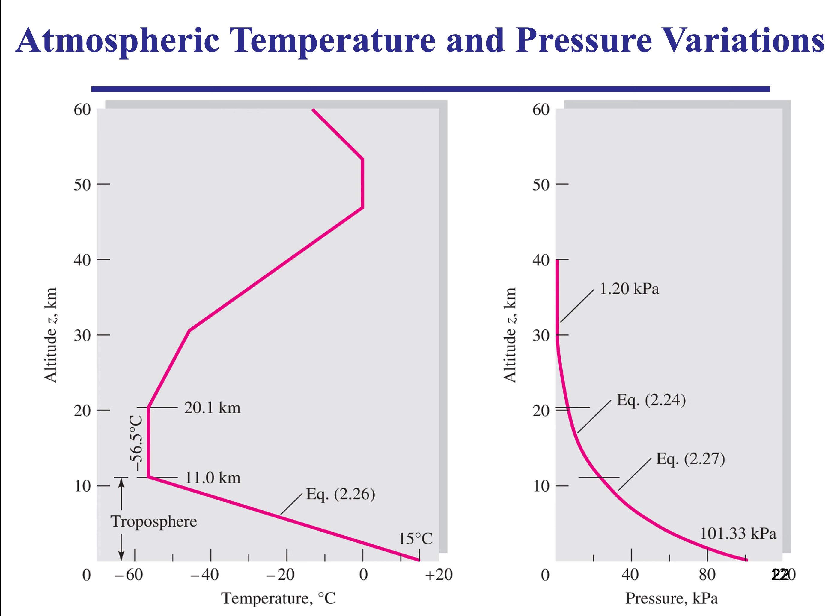So as we said, let's take Z to be the altitude from the surface of the Earth, pointing away from the center of the Earth towards outer space. Let's take the surface temperature, for instance, 15 degrees C, that's the air temperature, and around minus 50 at, let's say, 10 kilometers. That's where airplanes fly normally when they cruise, so around 35,000 feet.

So we want to show that this linear profile in temperature actually leads to an exponential or a power law relationship in the pressure. And we want, as a homework, to plot it. So let's do that.

So we'll start with a linear temperature profile. We can write the temperature in the form of AZ plus B, as you can see here. So T as a function of Z has a slope of A and B. And if you want to have the A and B, you need 2 points at 2 different altitudes where the temperature is known. For instance, here are 2 points that you can use, and this is basic linear algebra. You can easily get the A and B.

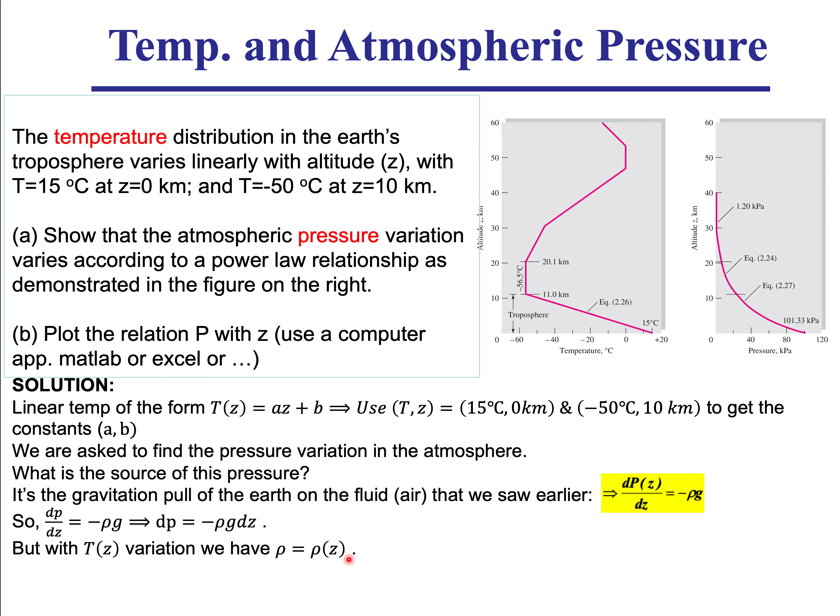Now, is it going to be linear like the temperature? We'll see based on the ideal gas law. So if we use the ideal gas relationship, you remember it as Pv = RT, where v is the specific volume. Specific volume is just 1 over density. So we can rearrange the density on one side. The density depends on the pressure. The higher the pressure, the higher the density. And the lower the temperature, the higher the density. So density depends on both pressure and temperature.

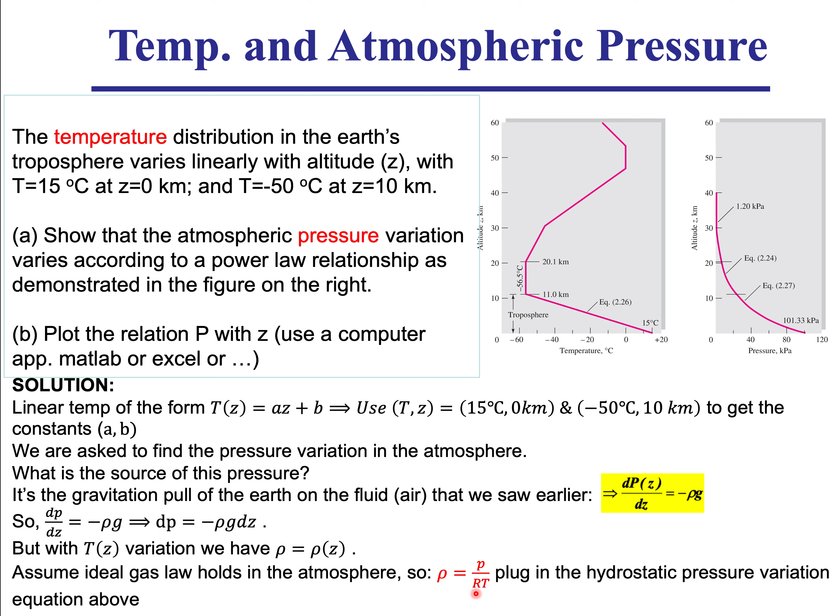So let's take this rho, plug it in here. So dP will be minus P over RT g dz. R is the gas constant for air, and T is the temperature. So we've replaced them, dP, and then we still have the minus sign. It's associated with us choosing the coordinate system z to be pointing away from the center of the Earth. And then we have a relationship between this temperature T and z that's given to us in the plot to be linear. And depending on the temperatures themselves, we can get the A and B.

So let's take this T, plug it back here, and we will get dP is minus P over R(Az + B) times g dz. Let's see. R is a constant, A is a constant, z varies, B is a constant, g is a constant, and then we can separate variables, so we can take the P to the other side. So dP over P is equal to minus this term times dz, and then we can easily integrate.

So we've taken the pressure to the left-hand side, and what do you get? Let's integrate from the surface of the Earth, z equals 0, to any altitude z. At the surface of the Earth, the pressure is atmospheric, and we want to know what the pressure at any altitude is going to be. So the integration of 1 over P, or 1 over x, would be the natural logarithm of x, and this thing will be done in a similar way.

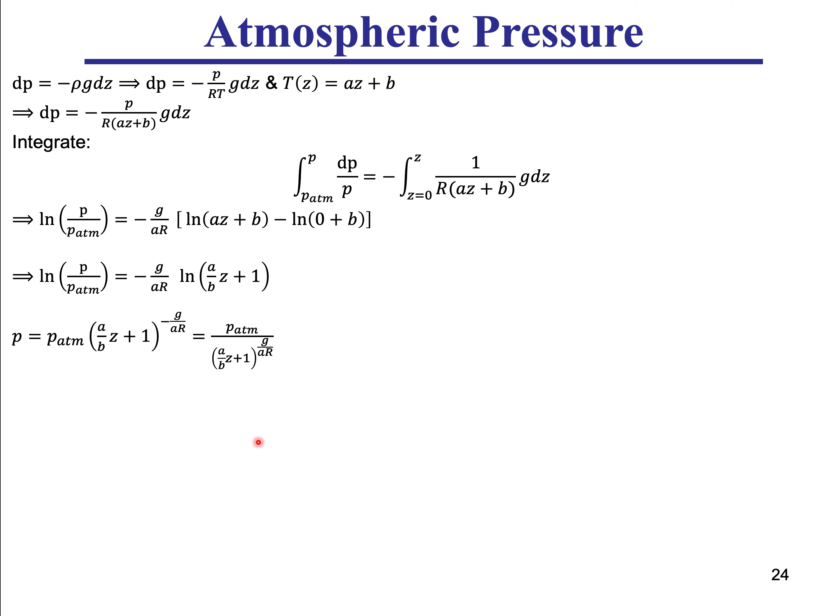So now that we have learned about the atmosphere, there are other implications about its content and how the atmospheric pressure comes about.

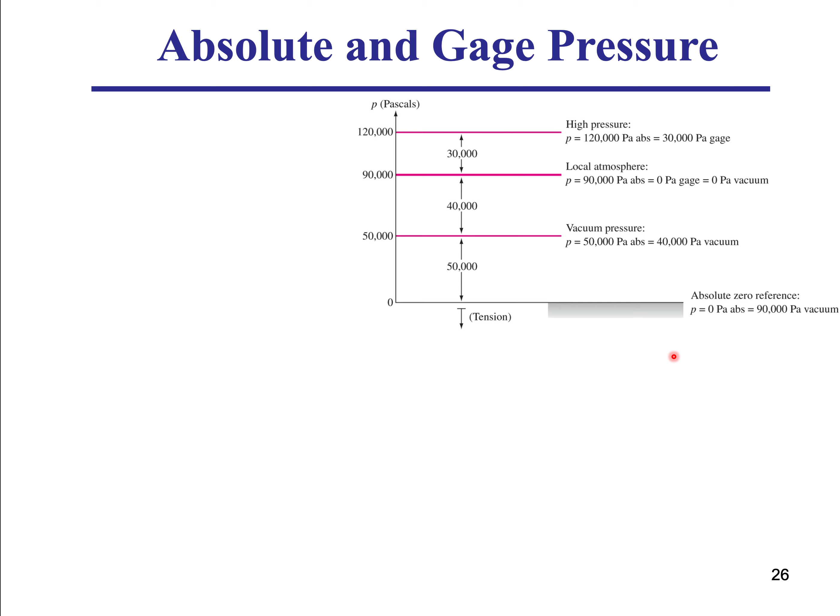There is one last thing we want to talk about, because this is also important from an industrial point of view, which is the convention that people use to report pressure. And that's all relative to the atmospheric pressure. So we know that the atmospheric pressure at the surface of the Earth is about 100 kilopascal.

And this is really pretty much, as we have seen in the thermodynamic tables of water, that water boils at sea level at around 100 degrees C, and when you go much higher in altitude, it can boil at a much lower temperature. So this pressure is the thermodynamic pressure, and this is really the absolute pressure. We refer to it as the absolute pressure. So there is an S missing here, or the absolute pressure scale.

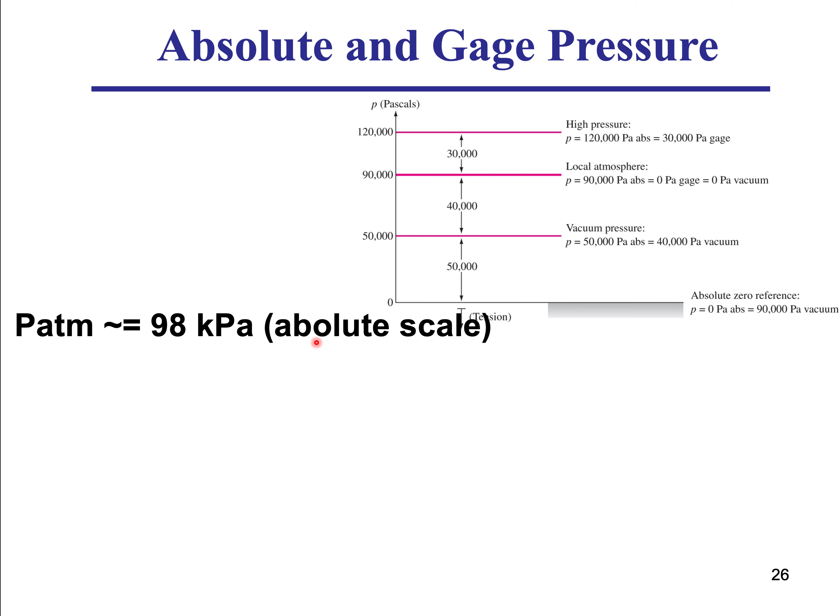But now you go to the gas station and you want to fill your car tire with compressed air, and then you look at the gauge, and you'll notice that when your gauge is open to the atmosphere, it's going to give you zero pressure, and this is the convention that we want to emphasize in this slide. That is, there are industrial conventions. Different industries report pressure in a different way.

So as thermodynamic engineers, there's no way about dealing with absolute pressure. What you see is what you get. It's the absolute pressure. But as practical engineers, people who work with pressure vessels, with tires, with pumps and so on, they deal with what we call gauge pressure. So when they report the pressure, they already subtract the atmospheric pressure from it. So that's a zero gauge pressure, and it already has the atmospheric pressure subtracted from the reading.

So when you're 10 psi, what is the atmospheric pressure? It's 100 kilopascal. That's about 15 psi. So when you fill your tire with 10 psi, you're filling it with 10 psi above the atmospheric pressure, which means you're really filling it with 25 psi in terms of absolute pressure scale.

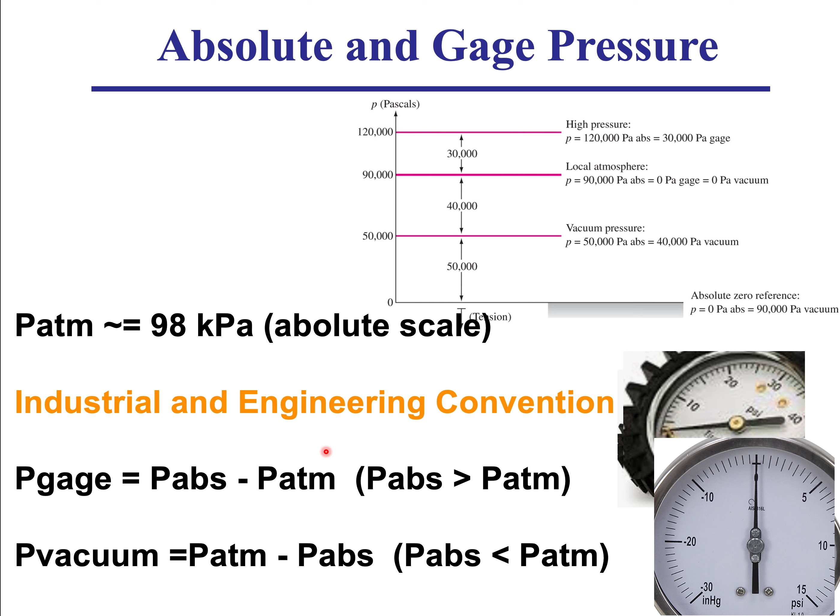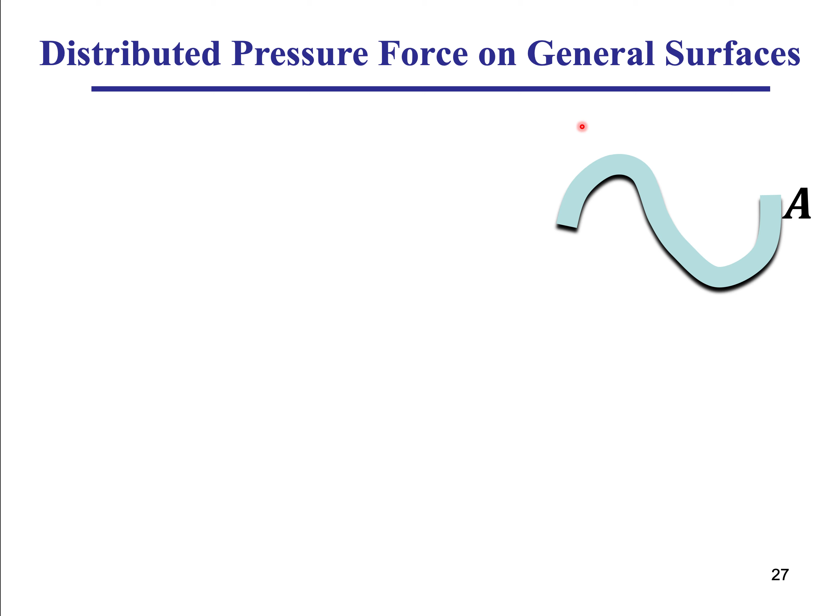So the next thing that we want to cover in this chapter 2 is when we have a surface of an area A, and we have a pressure distribution around that particular surface. So this pressure distribution could be the atmospheric pressure, uniform around it, or this could be a surface that's submerged under the surface of the water, so it has different pressures at different depths. Whichever it is, this top surface that we're talking about has a total area A, and has a pressure distribution on top of that surface.

And we are interested in knowing what is the net force that this pressure is going to produce on this surface, and what is the direction of that force, in other words, what are its three orthogonal components in the I, J, and K vector space, or in the X, Y, Z components. What are they for this force?

So this brings us back to our previous lecture that you really need now to remember and grasp very well, that pressure acts on a surface in a compressive fashion, so towards the surface, and it's also perpendicular. It's a force per unit area, so it's a force perpendicular to that area, pointing to that area. But now you see our surface here is not flat, so when the pressure is perpendicular on this piece of the area, it points where I'm pointing with the arrow. But if this is the area I'm considering, and I'm interested in the pressure force on this little area here, it will be pointing perpendicular in this direction that I have just prescribed with the mouse.

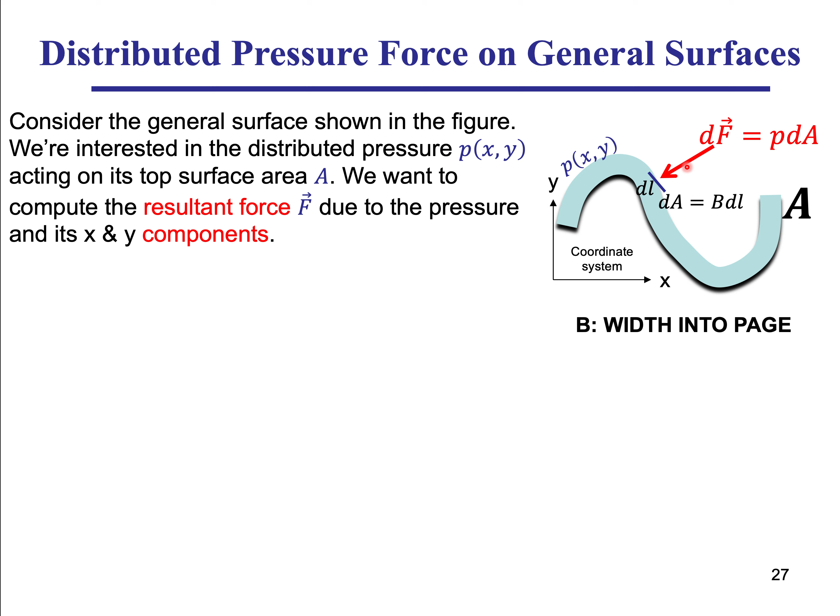So I have my area dA, and I have my pressure distribution. As we said, the pressure force acts perpendicular and compressive towards the surface. So that's our dF. It's just the multiplication of the pressure at this particular x and y multiplied by the area. And now I want to get the force on the whole surface. We sum them up, which we call the integration.

But be careful that when you're doing this summation, you need to do it as vectors, because the elemental force dF has a magnitude and also has a direction. So you need to include the direction in your calculation. And for you to do the summation vectorially, it's best that you break your force into components. So how do you do that integration? You break it into the i, j, and k unit vector directions, or the x, y, and z.

So the dF has a component in the x and a component in the y. My dF is making an angle theta with the x coordinate system. So I can do a decomposition or projection of the force dF onto the x and y axes. So my dFx will be just dF times cosine theta, and for the y it will be sine theta. So my F is equal to its Fx component and its Fy component. These are the two components of the force which we are after. So for Fx, we just sum all the dFx's, because now they don't have a direction. It will be just an algebraic summation, because they're all pointing along the x direction, whether positive or negative.

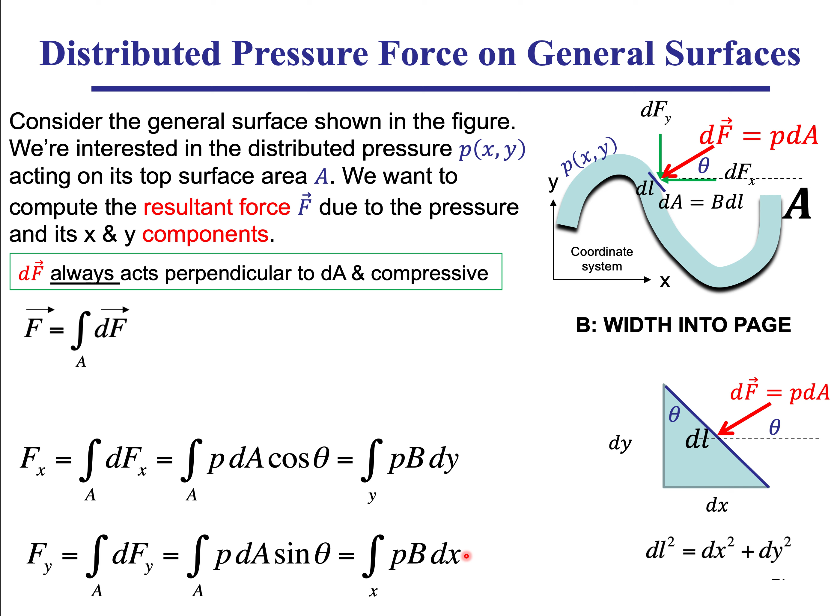And then you just integrate. So what do we need now to find the values? We need to know how the pressure is distributed in terms of y and in terms of x. So let's take some special cases. The first special case that we want to deal with is when the pressure is a constant. So here we set P is constant.

So that pressure is a constant, so I take it outside the integral. So I end up with just b times dy. And I'm integrating over the whole surface from x1, y1 to x2, y2. For the whole surface, when I integrate the dA, I'm going to get the area A. But if I integrate the b dy, the b is a constant, so it comes out also. I'm integrating dy. It's just the difference of y between the start point and the end point.

I don't care what the surface does, as long as I look at the start point and the end point. If there is no difference in the y, I'm not going to get a net x force. And you can imagine why that might happen. If this is a perfect sine shaped surface, looking at the Fx, the forces are pointing towards the surface in this fashion. So on this surface they're pointing to the right, on this surface to the left, and on this surface again to the right. And since it's a uniform pressure magnitude, they will end up cancelling each other.

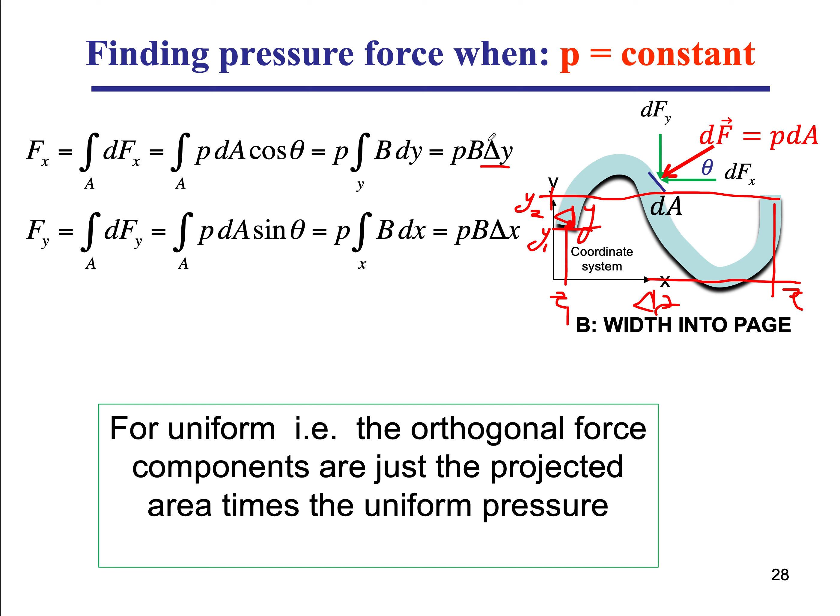So now let's move one step up to when we have a more general hydrostatic pressure distribution. So let's look at the case where my pressure distribution is hydrostatic, so it varies with the depth. In this case, instead of delta z, I'm going to use the y to be my z. So P is rho g delta y. So that's my depth. So my gravitational vector is in this direction.

So you do the same thing, except now P varies with the dA. So I can't take it outside, it's not constant. And the dA cosine theta is just your dy times b, the width into the page. Same story with the Fy component. But then let's say you compute the Fx and compute the Fy. There are two things you can find out. There is the net force, that is the vectorial sum of those two components, so it's the square root of Fx squared plus Fy squared.

And you have the inclination angle. So let's say I end up with my F net. I find my Fx like so, and this would be my Fy. So my F net is going to be in this direction, and the inclination angle alpha will depend on the magnitudes of Fx and Fy through the tangent. That's not the line of action, I'm sorry. That's the slope of the line of action relative to the x-axis. That gives me the alpha. But is that line of action crossing the x-axis at this location, or at this location?

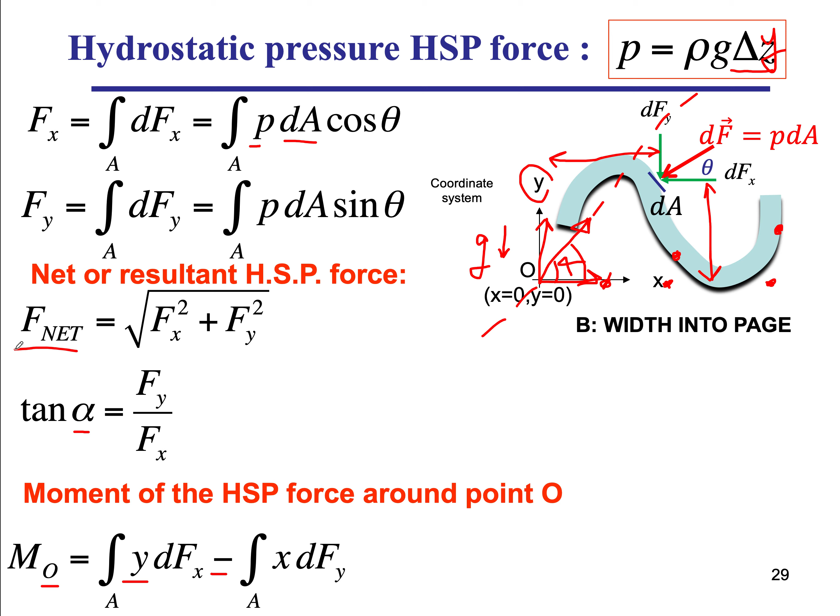So the center of pressure would be the point through which, if the net force passes through, it would create zero moment. So what we have done is we have computed the moment around some arbitrary point, which is the origin. We have computed the net force. We could easily do that based on these integrals. And now we're going to translate the force, and when you translate a force, you add a moment to it.

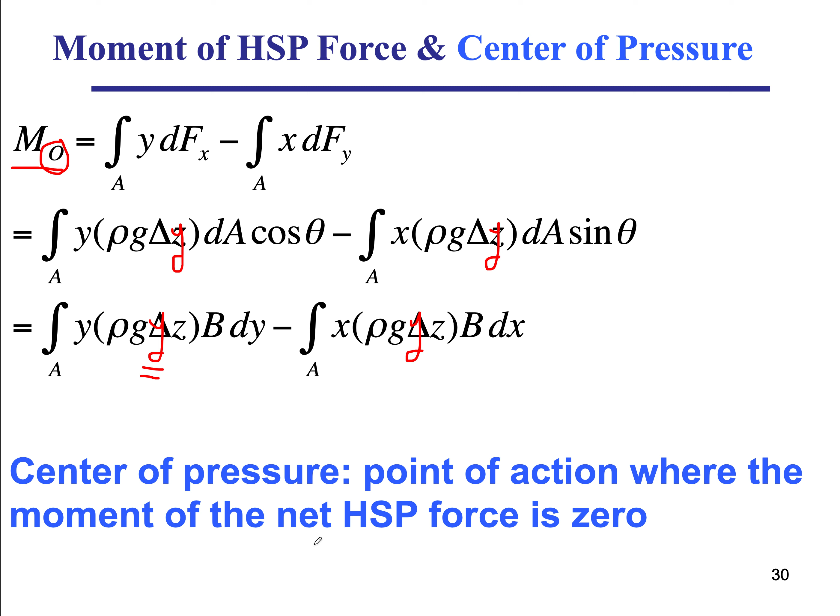So let's define the center of pressure to be the point where the hydrostatic pressure force produces zero moment. Let me call that my center of pressure CP. The moment due to the hydrostatic pressure force about my center of pressure is going to be 0. In one way, you can go to the previous equation and say M around the center of pressure will be equal to the distance of YCP, still an unknown location, and XCP, measured from CP, and that would be equal to 0. So this would be a cumbersome equation to solve.

A much easier one is, since you have the pressure distribution, you find the F net, you find the moment around an arbitrary point, point O. And then you use the magic of your statics course, where you can move a force along a line, but then you add the moment associated with the distance that you have moved. So if you divide the moment around point O by F net, that gives you the distance L. If you place the force F net at a distance L from the origin, you get to the center of pressure right away.